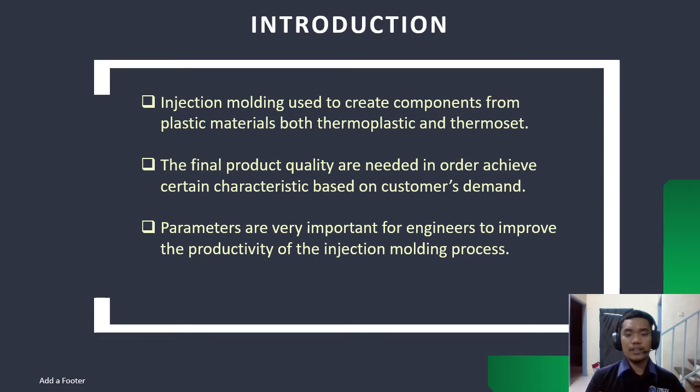Okay. Injection molding is used to create components from plastic material, both thermoplastic and thermoset. The final product quality is needed in order to achieve certain characteristics based on customers' demand. And the next important thing is the parameters are very important for engineers to improve the productivity of the injection molding process.

Now let us dive into the objectives of this thesis. There are four objectives: to determine the most significant injection molding process parameter based on the tensile strength of virgin polypropylene. Next, to optimize the combination of injection molding process parameters for virgin polypropylene, to rank the injection molding process parameters for virgin polypropylene, and lastly, to predict the optimum value of ultimate tensile strength.

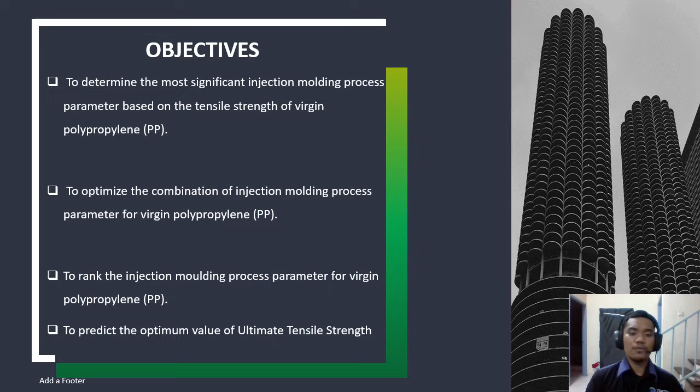Every research comes from a problem statement. This thesis is very important in order to reduce the manufacturing cost to sustain in the market. Next, tensile strength of a material will always be the customer's concern.

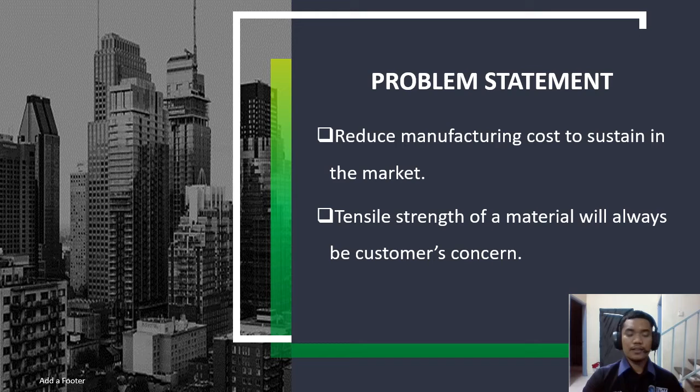Next, the scope of this research. The scope consists of the material, virgin polypropylene, the process of the injection molding machine, and the injection molding process parameters, which are cooling time, packing time, injection speed, packing pressure, and mold temperature. The Taguchi optimization method has been deployed in this research, and the study of the ultimate tensile strength.

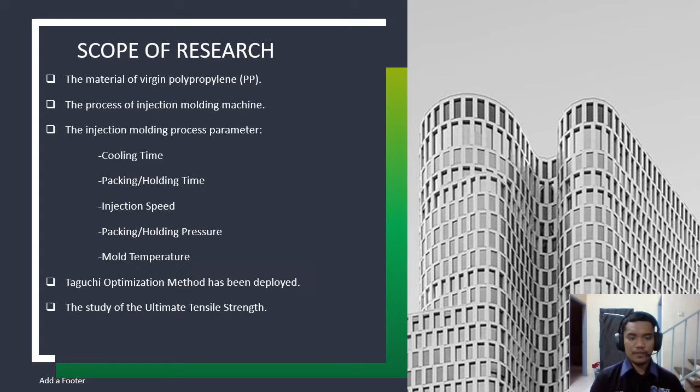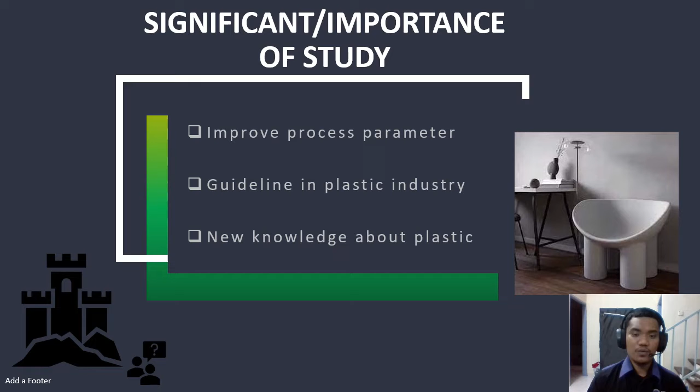Now we move to the importance of the study. This thesis is very crucial to improve the process parameters of injection molding for polypropylene plastic material. Next, to give a guideline in the plastic industry. This will more or less reduce the time and cost itself. Next, to gain new knowledge about the plastic industry.

Now, let's proceed to the literature review. The main topic in this study is the injection molding machine. So, what is an injection molding machine? How does the machine work? Injection molding is a manufacturing process for producing parts by injecting molten material into a mold, and it can be performed with a host of materials, mainly including metals, glasses, elastomers, confections, and most commonly thermoplastic and thermosetting polymers.

First, the material for the part is fed into a heated barrel, mixed and injected into a mold cavity where it cools and hardens to the configuration of the cavity. However, the quality of the product is based on the process parameter setting. So different process parameters produce different quality of a product.

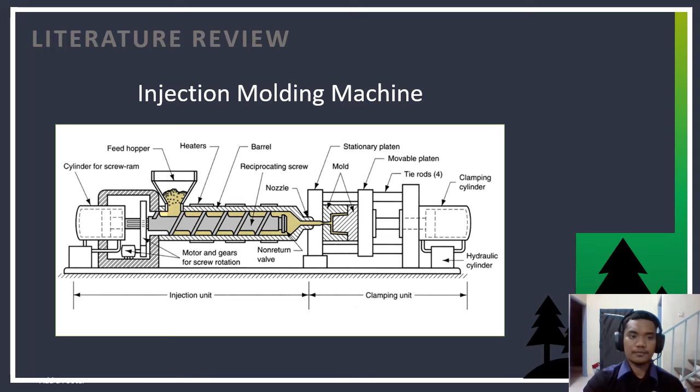Now, the next important thing in this study is obviously the material itself, which is polypropylene. Polypropylene, also known as polypropene, is a thermoplastic polymer used in a wide variety of applications, and it is produced via chain growth polymerization from the monomer propylene. Polypropylene belongs to the group of polyolefins and is partially crystalline and non-polar. Its properties are similar to polyethylene, but it is slightly harder and more heat resistant.

Next, polypropylene is also the second most widely produced commodity plastic. So what is commodity plastic? Commodity plastics are produced in high volumes for applications where exceptional material properties are not needed, such as packaging, food containers, and household products. In contrast to engineering plastics, commodity plastics tend to be inexpensive to produce and exhibit relatively weak mechanical properties. Some examples of commodity plastics are polyethylene, polypropylene, polystyrene, polyvinyl chloride, and polymethyl methacrylate.

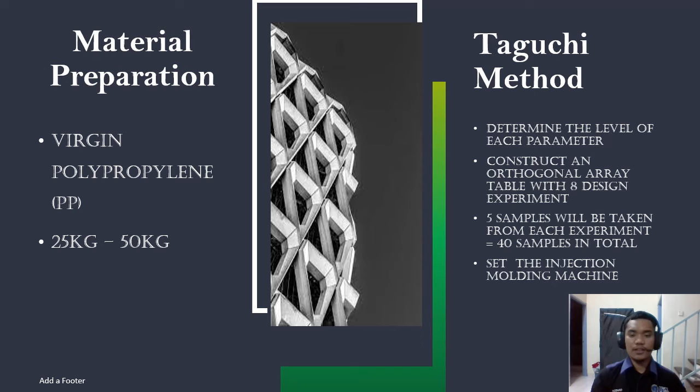In the tensile test, the value of the ultimate tensile strength of each specimen will be determined using the ASTM D638 dog bone specimen. After all the data has been gathered, the data will be analyzed in Minitab software.

As a conclusion for the methodology, we can achieve all the objectives: which process parameter is the most significant, the rank of each process parameter, the optimum combination of process parameters of injection molding PP, and last but not least, we can predict the optimum result of ultimate tensile strength.

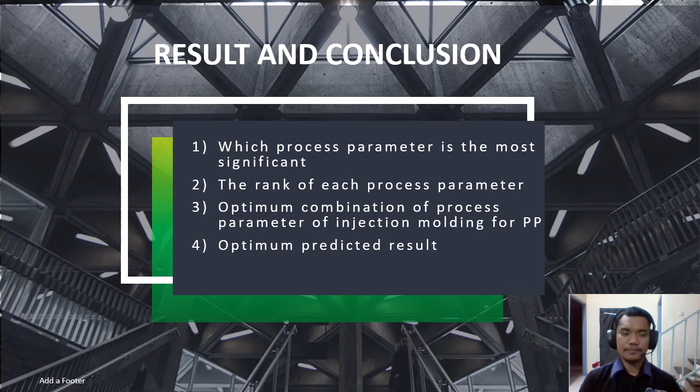Now, proceed to the results and discussion, chapter 4. For the results and discussion, design of experiment is very crucial to examine the relationship between various factors and response in a systematic and efficient manner. Basically, in this study, there are two different levels of each process parameter, and then a few trials were made to determine the mean of ultimate tensile strength.

At the end of each run, data of ultimate tensile strength are collected. Then DOE in Minitab was used to identify the quality-affecting process circumstances and product components, and then establish the factor setting that optimizes the result.

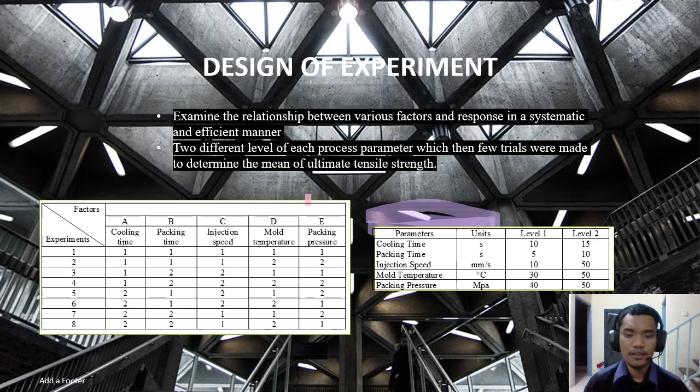Okay, now proceed to findings and data analysis. So based on the orthogonal array, it demonstrates that the lowest value of mean for ultimate tensile strength is 29.2 megapascal, and the maximum value of mean for ultimate tensile strength is 32.2423 megapascal, each from trial 4 and trial 2 respectively.

In this study, the ratio, the greater the better, is chosen to improve the prepared parameters. The process parameters with the highest mean value consistently produce the best quality with the least amount of variation. As a result, in this study, the process parameter levels with the most value of mean resulted in a greater prediction of ultimate tensile strength.

And next, to determine if the relationship between the response and each factor in the analysis is statistically significant, the p-value for each factor were compared to the significant level using null hypothesis. The null hypothesis states that the term of coefficient is zero, showing that there is no relationship between the factors and the response. Typically, a significant level of 0.05 works well, and it represents a 5% chance of determining that a relationship exists when there is none.

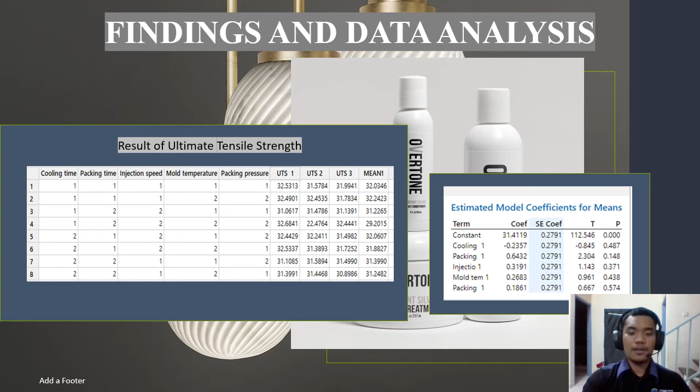The response table is used to select the best level for each factor. The factors that have the greatest influence on each response characteristic using the delta and rank values. Then, the level of this process parameter that correspond with the objective of this study can be evaluated. This is because the optimal level of a process parameter for one ultimate tensile strength may vary slightly from the best level for another ultimate tensile strength. To solve the optimization problem, the result among the combination of factor level is estimated to determine which one reaches the greatest result.

In this study, factors with the highest delta value is rank 1, which is packing time, followed by injection speed, mold temperature, cooling time, and packing pressure, respectively. Moving on to main effect plot for means. The main effect plots represent the best combination of evaluating process parameter for optimized significant factor. This shows the ideal parameters combination for each factor study. In this study, larger the better SN ratio is considered to compare the level of each parameter, which means that the highest value of ultimate tensile strength is selected as the significant factor.

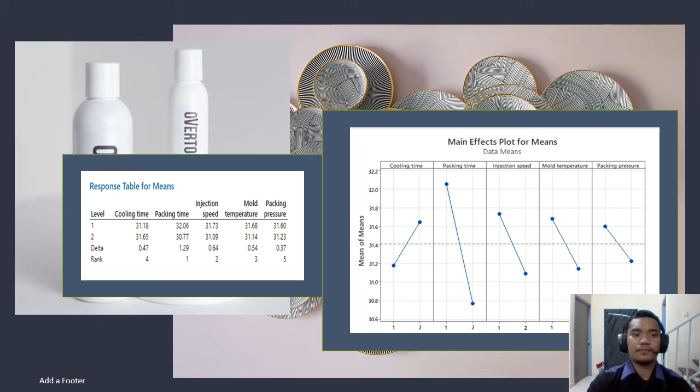And moving on to predicted result. Based on data analyzed, the optimum process parameter setting in the study are cooling time at level 2, packing time at level 1, injection speed at level 1, mold temperature at level 1, and packing pressure at level 1. It is shown that the predicted value of mean by using the predicted process parameter setting is 33.0642 megapascal, which resulted the highest value of ultimate tensile strength in this study. In this case, the ultimate tensile strength value for the condition setting is at its optimal value.

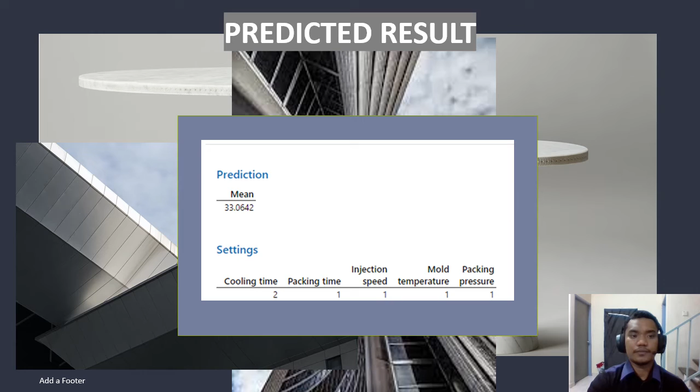In conclusion, there are 5 process parameters in injection molding, which are cooling time, packing time, injection speed, mold temperature, and packing pressure that had been studied using orthogonal array from Taguchi method. Then the ultimate tensile strength of polypropylene plastic of dog bone specimen had been examined, and all the objectives had been achieved. So all I can say is that this study is successful.

For future recommendation, there are lots of research can be done in order to improve the quality of the product. In this study, 3 trials have been done during tensile tests. In the future, more trials are required to give the best result. This is very important to reduce the number of errors occurring during the testing. Hence, the pattern of the result can be analyzed clearer, as it may increase the reliability on the data of an experiment. The bigger the number of repeated trials, the more certain it may be in a result when declaring either the hypothesis was supported or not.